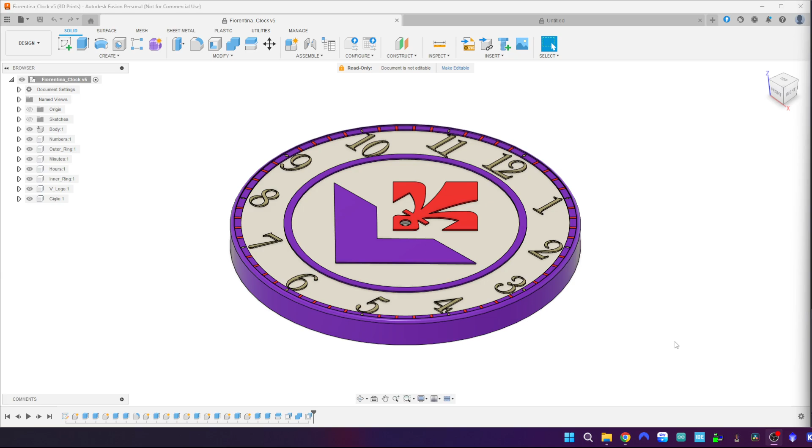So let's get started. Open another tab and create a new sketch. I normally like to put a circle as a reference. I want to have this clock at 230.

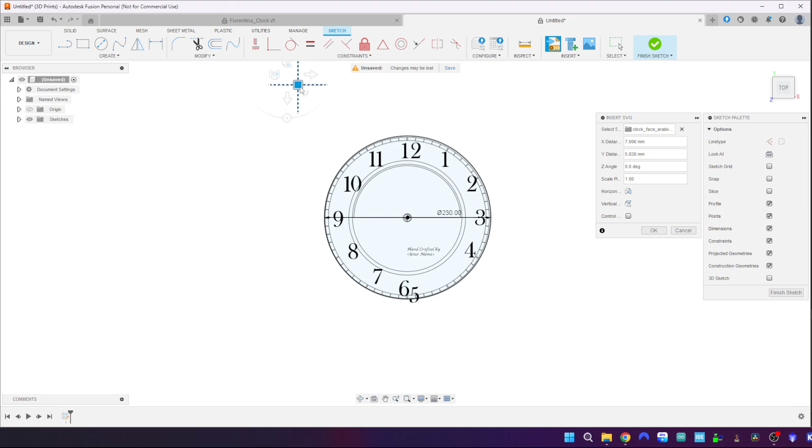So then I can go and insert from... let's have a look at this one. Insert the SVG and we rescale it roughly to match the size you want, which is roughly that.

Okay, now you don't really need that one anymore. First thing to do is convert everything into lines, and as you can see we need to adjust a little bit the numbering. So let's do that now.

If you find a better SVG, probably all this is not necessary. Let me put this one more into the middle, probably there and there, a little bit more. See if I can select both. Yeah, like that. And get this one, put it there, and then this one we go there. Like that.

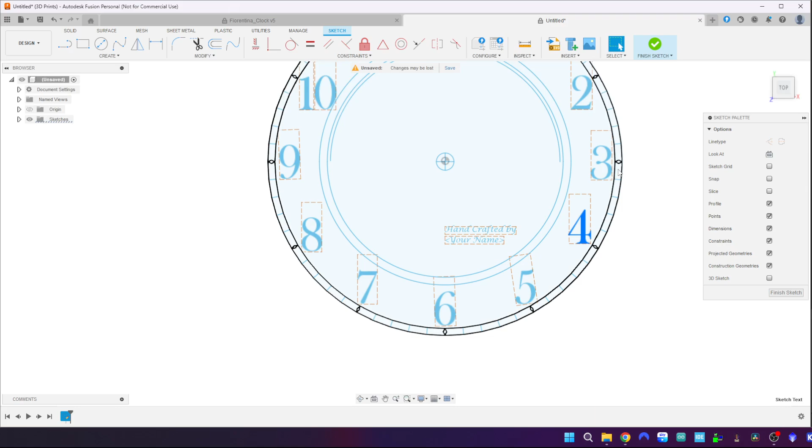And that should do. Okay, it looks okay there. So I can delete that one, and I can actually delete that one too. What else do we have here?

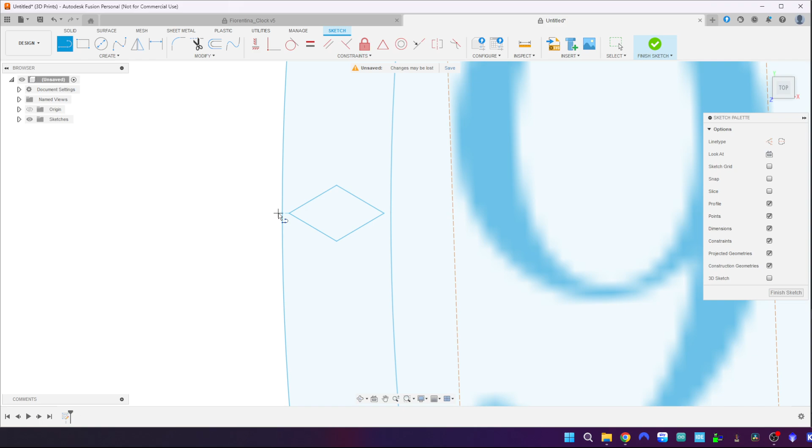Okay, let's see if I can center everything point to point. So I hope this is center. No, it's not. So let me delete all that and see if I can find... hopefully this one is in the center, and looks like we are leveled.

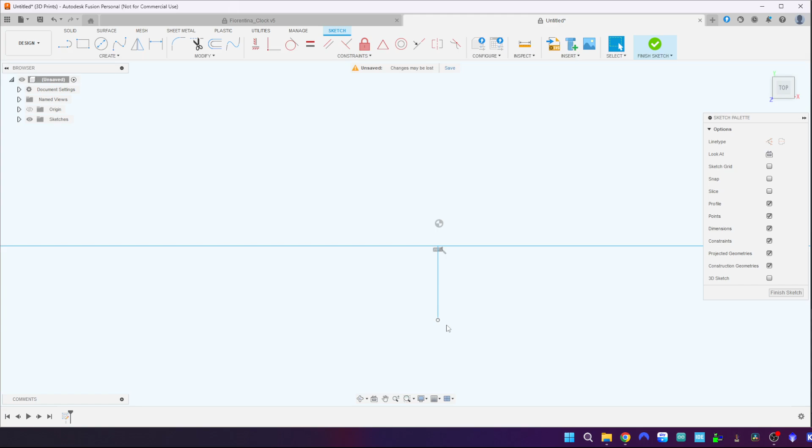And now I get the line until I find... should be able to find the middle point. Is that one? Let's try. Connect everything, point to point. And we move that one to there. That should have moved everything to the middle. Now I can remove that, and I can remove that.

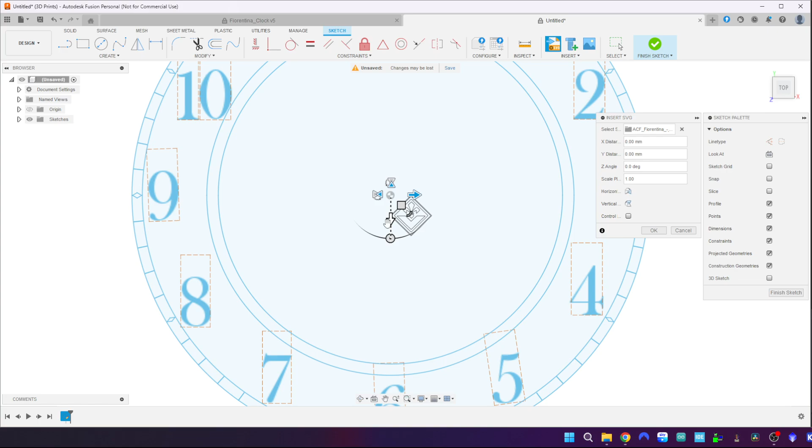Now, next thing I want to import is the logo of the team, which is this one here. And I'm going to move it, leave it inside until I get the scale right.

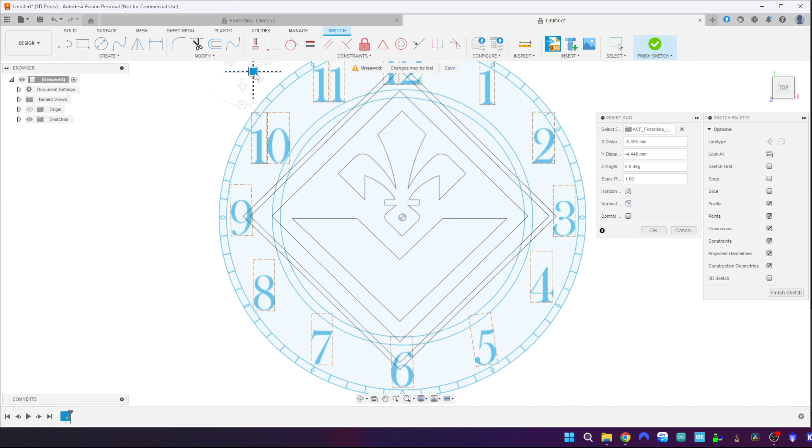And that... probably it's a bit bigger. Well, I'm looking at the symbol here and this V shape. I'm not looking at the rest of it. Right, I think that seems to be okay.

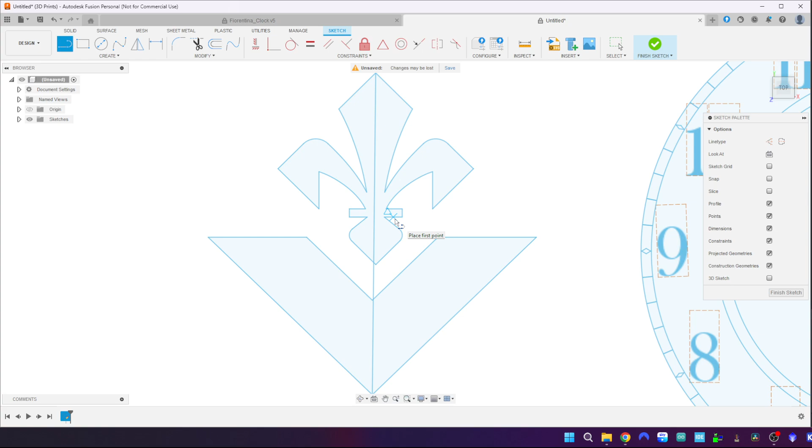So let me move it to the side, press OK, and do that again, and then remove all the bits, and then see if I can find... it's not completely centered.

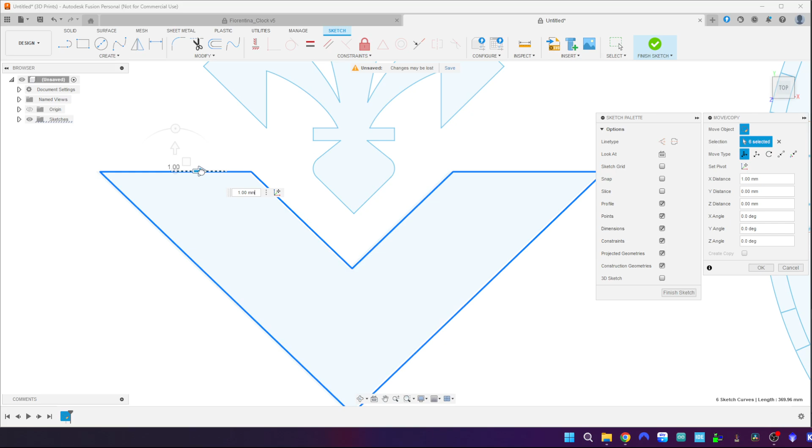Let me have a look. It looks slightly better. So now I am moving the whole lot inside there, and what I'm trying to do is I don't want to waste too much time on here, so I'm eyeballing it. This should be roughly in the middle of that, and that looks like it.

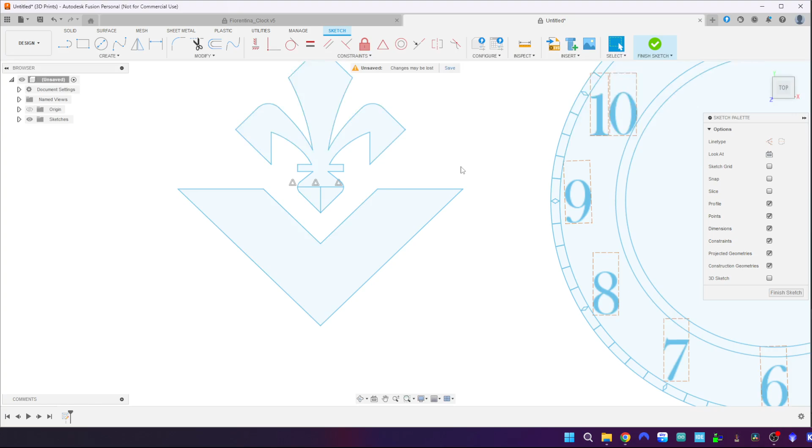Oh, actually, let's do it slightly better. So we roughly get the middle point there, and we get the middle point there. So now what we can do is reselect everything, move point to point, and we click on that point there, and that should be pointing there, and that looks actually nice.

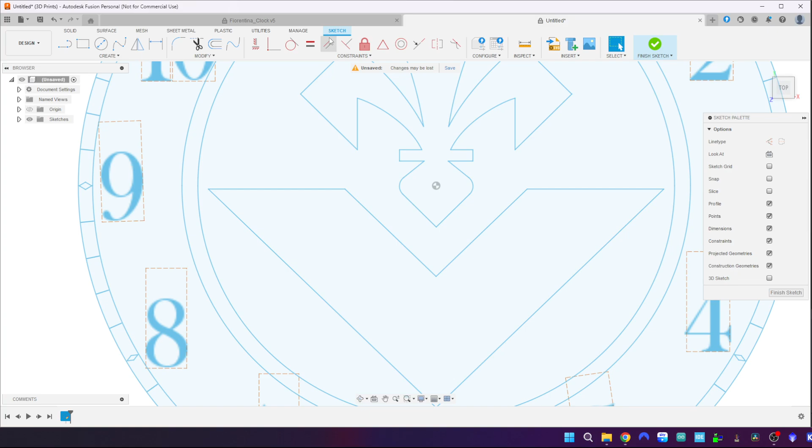On this one I just eyeball it, to be honest. I haven't measured anything up. So now we have the main face of the clock done.

What I want to do, because this one will be printed probably 3-4 mil thick, and then there will be the mechanism going behind. The mechanism I have, I got it from Amazon, it's about 16 mil thick. So what I want to do is create a base to offset the face from the wall.

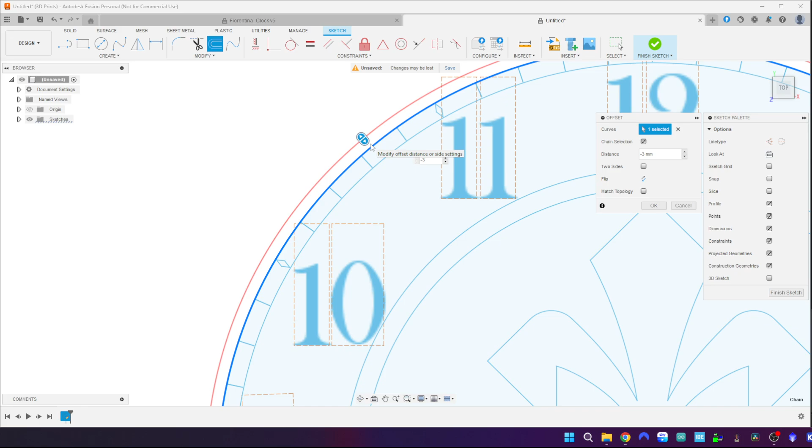So what I'm going to do is offset this one, not two sides, one side, and we offset as a minus, minus, let's do 3 mil. I need to get a bit of strength there, and we do it that way.

So now the main sketch should be finished, and I click finish sketch. Now we should be able to start to extrude.

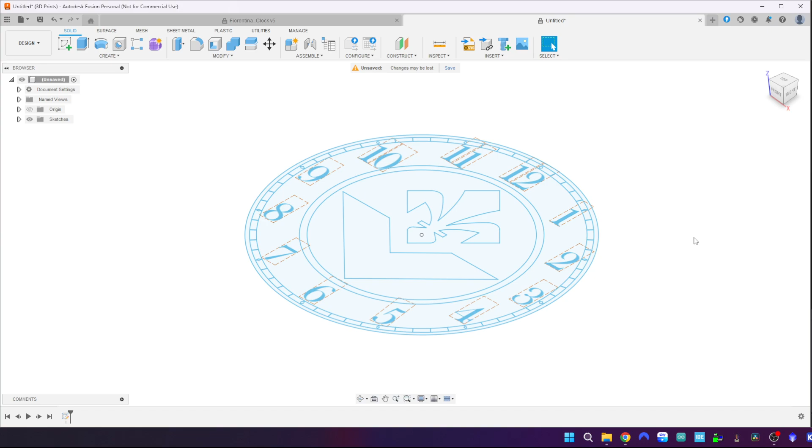So what I'm going to do is create the base, then the numbers, the V and the logo, plus the circle, and all the minutes will be raised from the bottom plate by about 1 mil. Then I'm going to extrude this one 1 mil higher than everything else, because after printing I want to put some clear resin on top of it to make it shiny.

So let's try to do that. First thing I want is, select all, extrude the whole lot, and we extrude... I think, did I say 3 mil? And then we create a new component here, and we press OK.

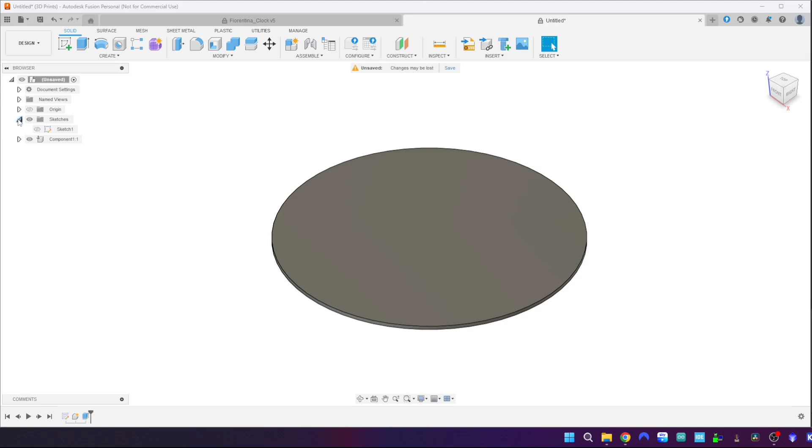Now we put the sketch back, and we can start to, I can hide that one, and we can start to see if I can do them all together. All the numbers. Oh, another one. That, and that.

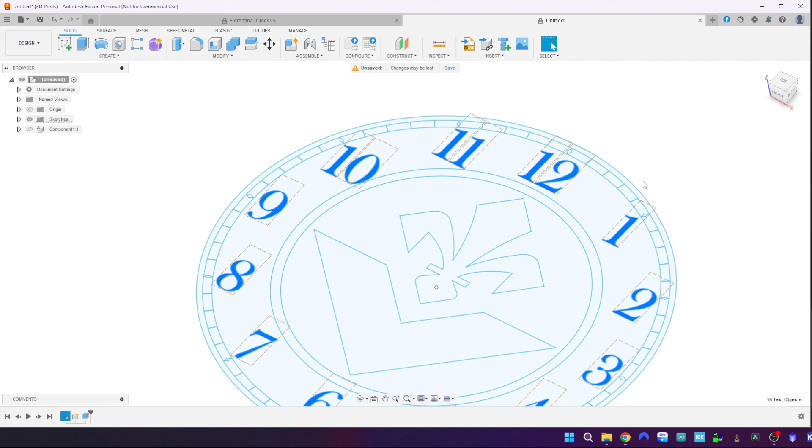Extrude. So now I want to offset, because I've got 3 mil up from the base, so 3 mil offset, and the distance is 1 mil. And again, a new component, and press OK, and we rename this component 'Numbers'.

Cool. Now, oh, I forgot to do one thing here, but I can do it now. I wanted to offset all these to create lines for the minutes.

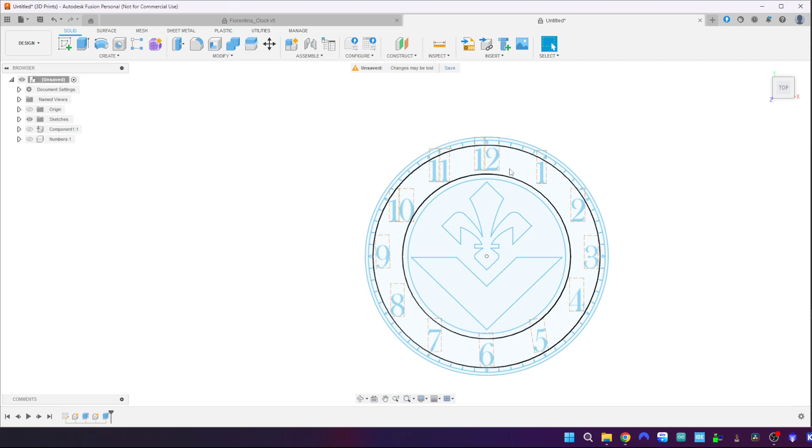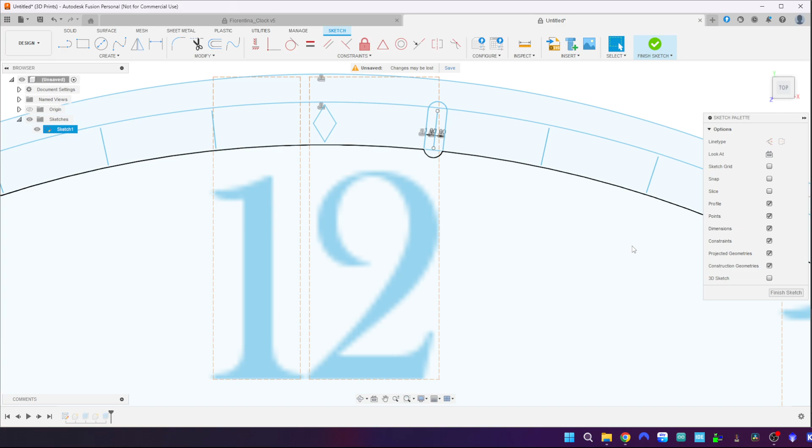So let me go back to the sketch and edit the sketch. We edit the sketch and offset two sides, 1 mil, 1 mil, 2 mil. Yeah, that's okay. And we do that for all of them. Offset 1, okay. Offset, okay. And so on.

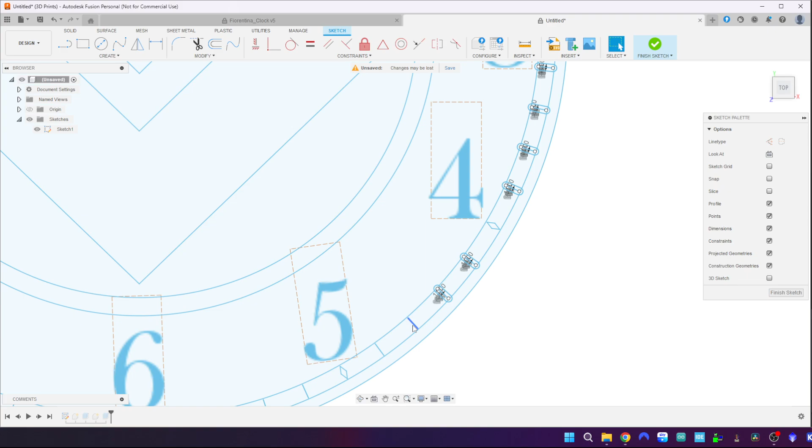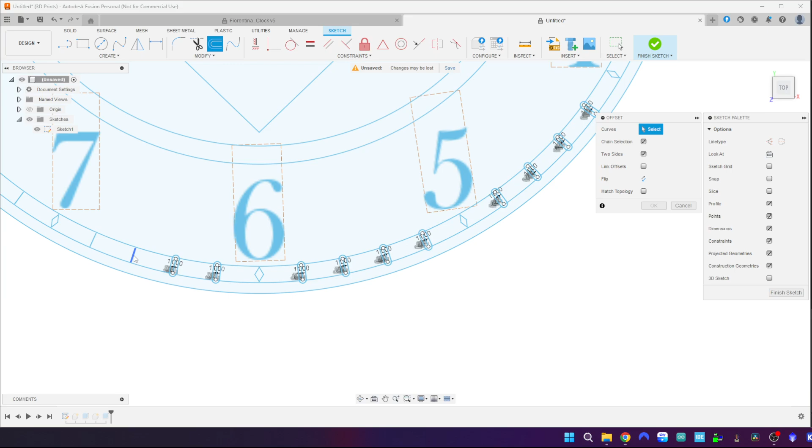Oops, got the wrong way around on that one. And it's a very tedious job, this one. I probably would be better off deleting them all and doing a circular pattern to create all at once.

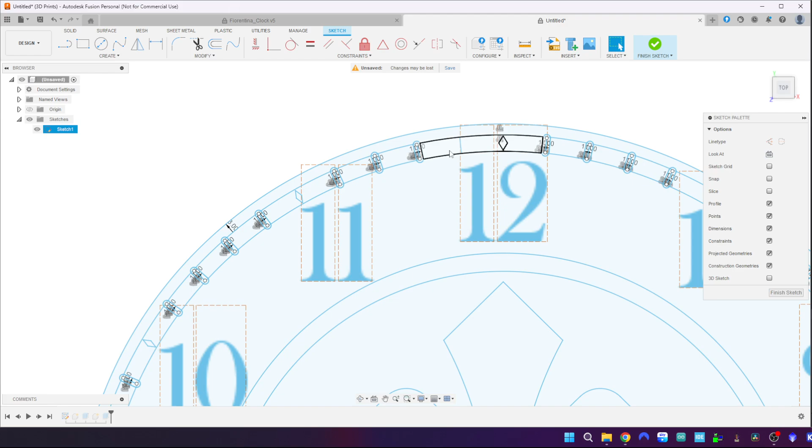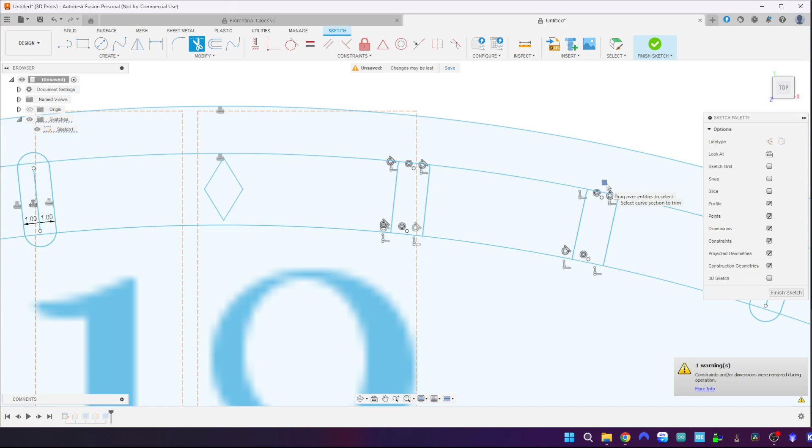Nearly there, although we need to go back and do some cutting. Right, so now start the even more tedious job. And we do all that. Lots of patience needed to do these little things.

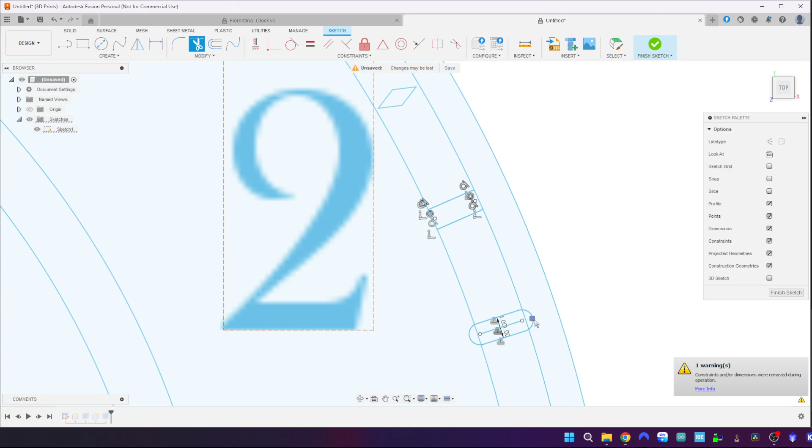Don't know why I've got double lines. Not sure why I got those. And so on.

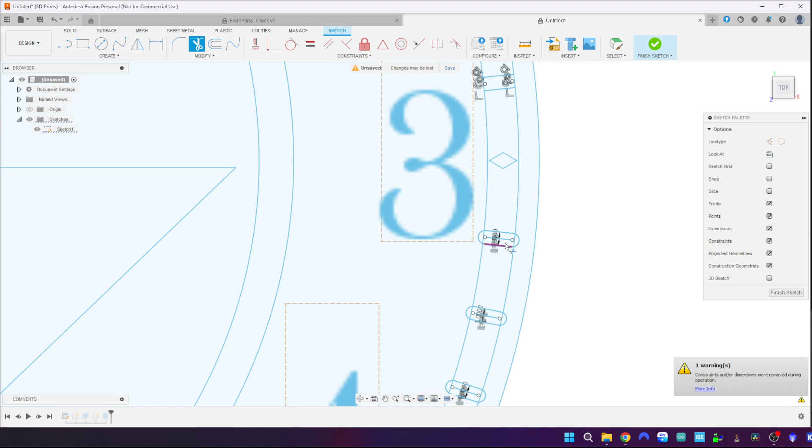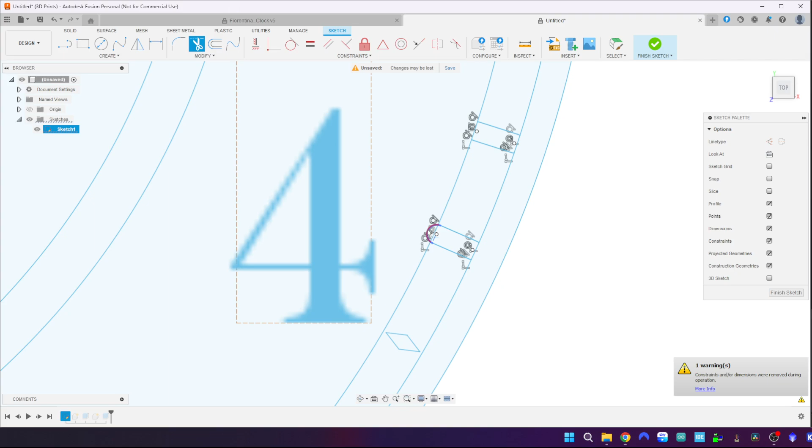I mean, I should be editing the video and make it faster in this section here, but I'm not really good at editing yet. I haven't actually played with it. So I don't want to just waste time on editing where probably I won't gain much. You can fast forward that if you wish.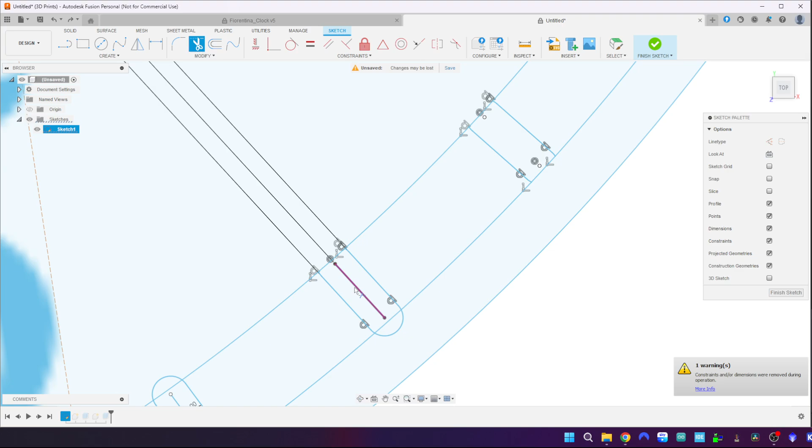Click, click. Nearly halfway.

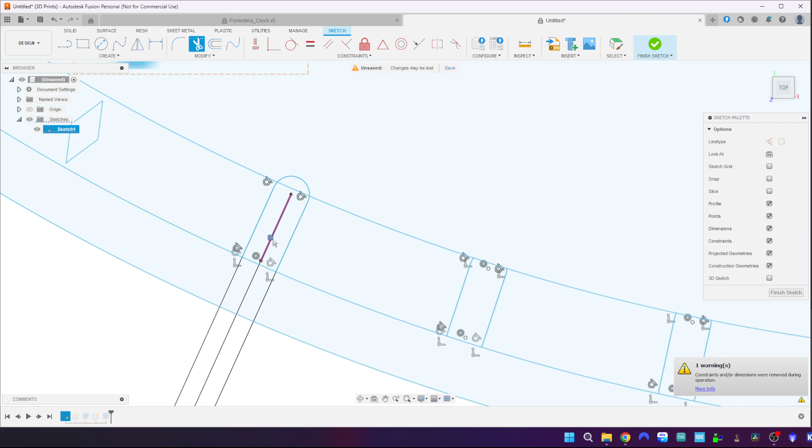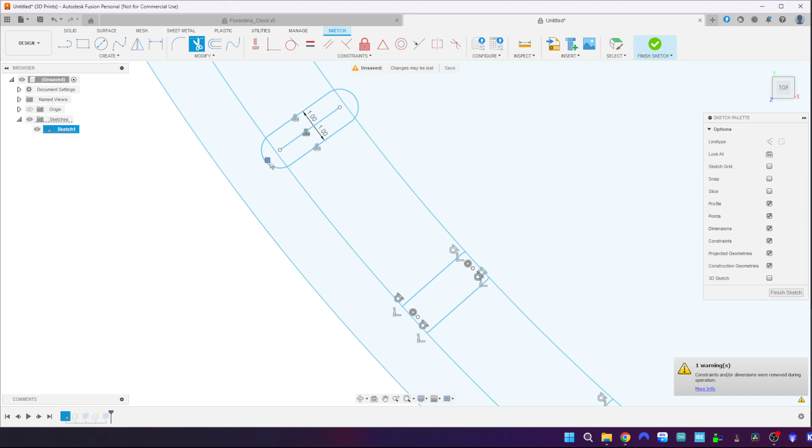Also, I could have put the video in pause, but the pause button has disappeared from my recording software, so I don't know what I did, because I've played a bit with the settings of the microphone, so hopefully you can hear me slightly better, and also less ground noise. Also, I have a new microphone coming soon, so well, give that one a try, and see if we can improve the recording of the videos. I know there's not much we can do about my voice and my English, so I hope you can bear with that.

If I could change that, I would be very happy to do it.

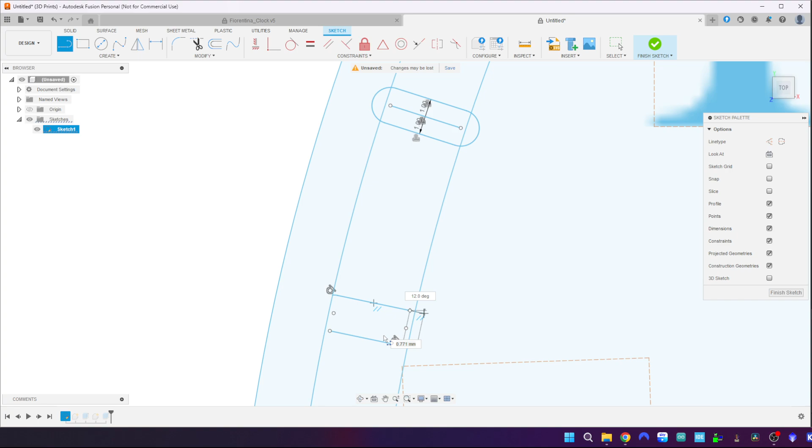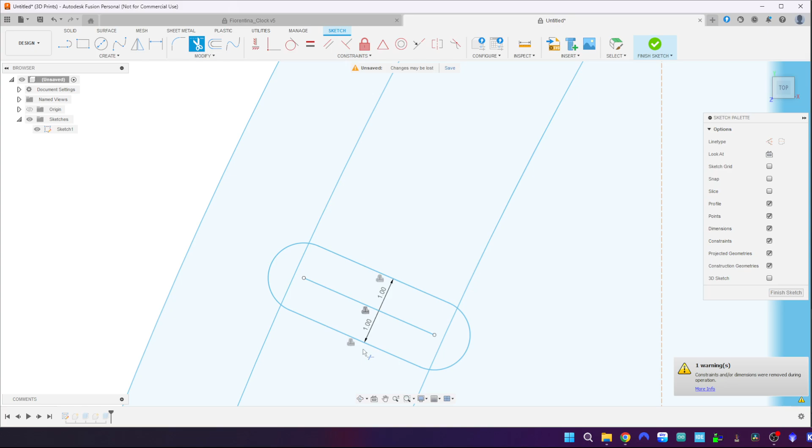Oh no, this computer I think needs a bit of a refresh. Start to lag a bit. Got too many programs installed. I think it starts to get a bit clunky. That's Windows.

I wish they could do Fusion 360 for Linux. I would use that instead. I have read we can run it with some sort of emulator, but I'm not sure how good that is. I may try one day, but not at the moment. I've got too much going on.

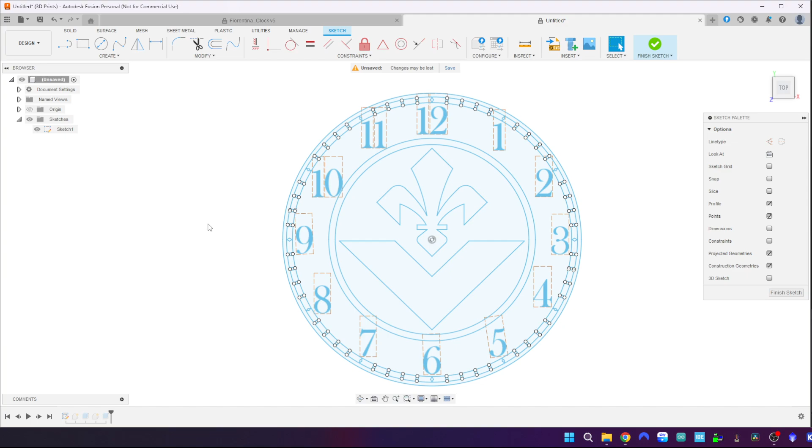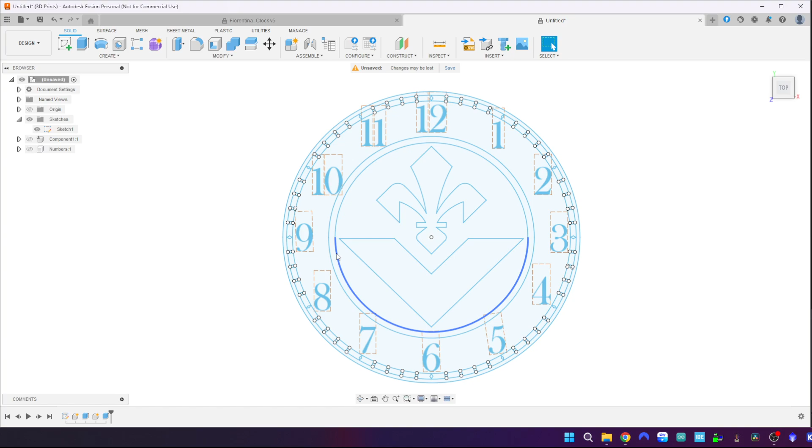So we've done that. Let's finish the sketch again. And now where we were, we've done the numbers, so we can extrude. Done the number, we've done that. Don't need to do this. I need to do that. So extrude that. Let's not forget what we need to do.

So 3 mil from there, 1 mil up, new component, and I can call it inner ring. Put the number back in, extrude that one up, offset 3, 1, call it V.

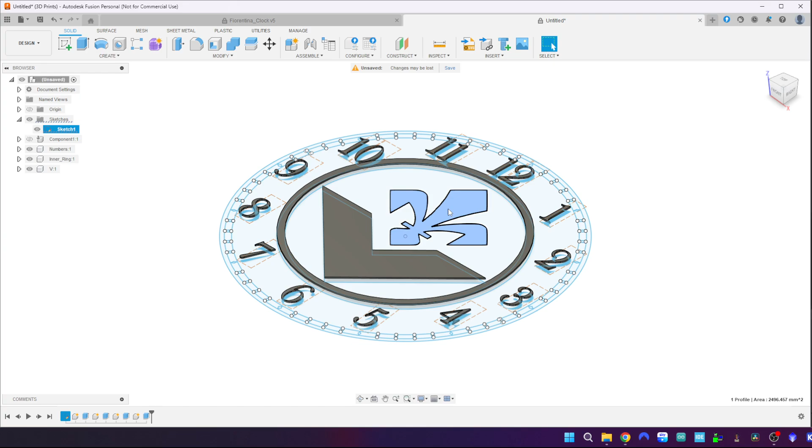And extrude again, offset 3, no, that one, 1, and Giglio - sorry, that is the name of my team. And now what we're gonna do, we need to select all these individually.

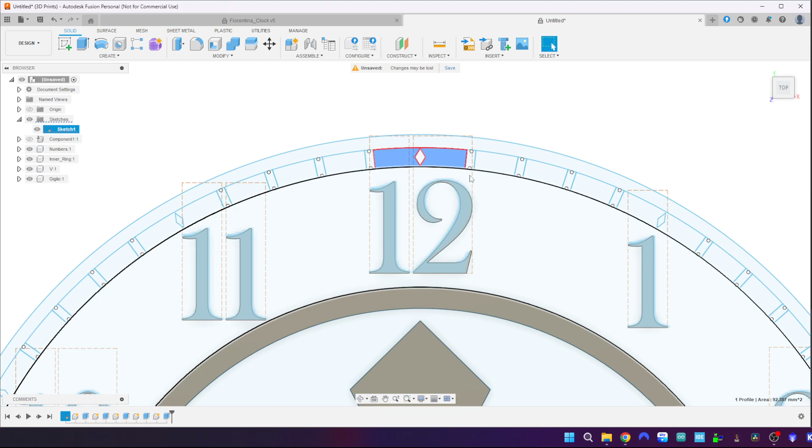This is not too bad because they're quite big. You can select quite quickly. And we do extrude.

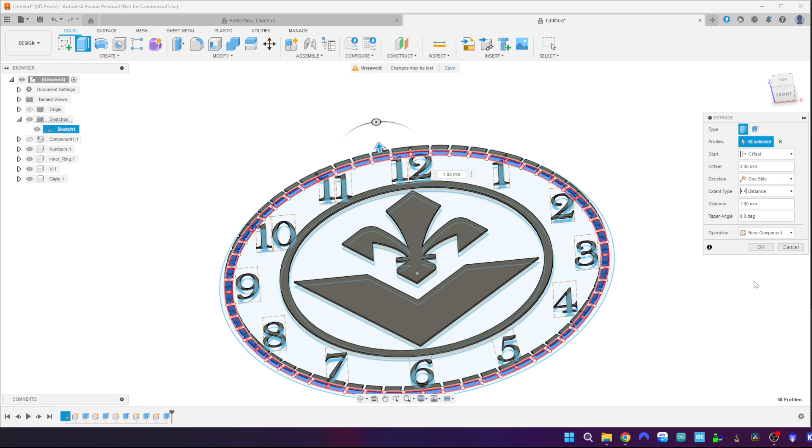The arrow still in the right direction. 3 there, 1 there, new component, and OK. Call it outer ring.

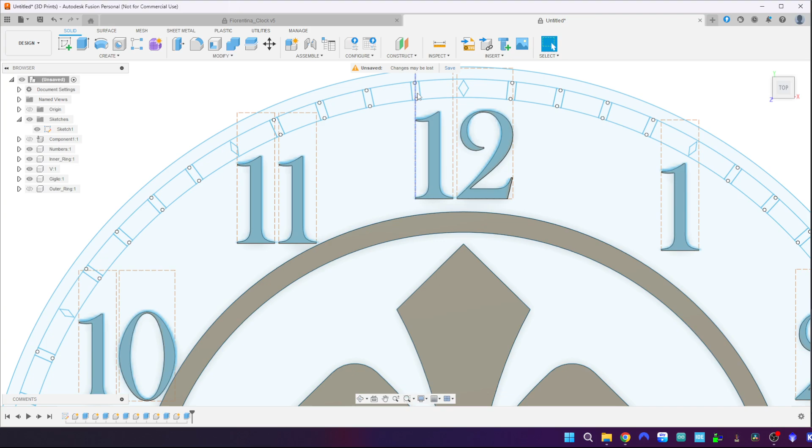I'm gonna hide that one because it will be in the way. And now I need to do all those. Those will be the minutes, and then the hours we'll do later. I want to keep them separately because I'm gonna print a different color.

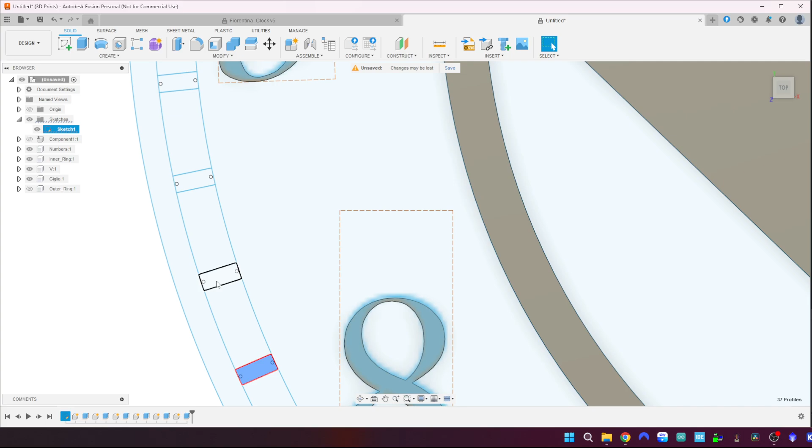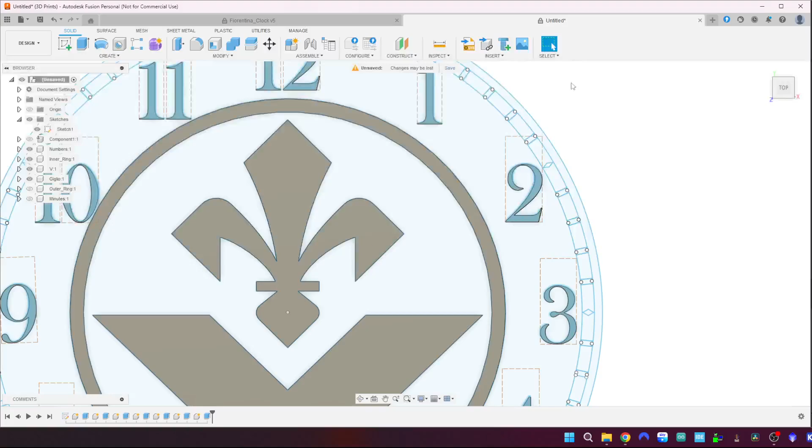There we go. Extrude 3 mil, 1, new component, and OK. And here we call it minutes. And now I think the last one for now.

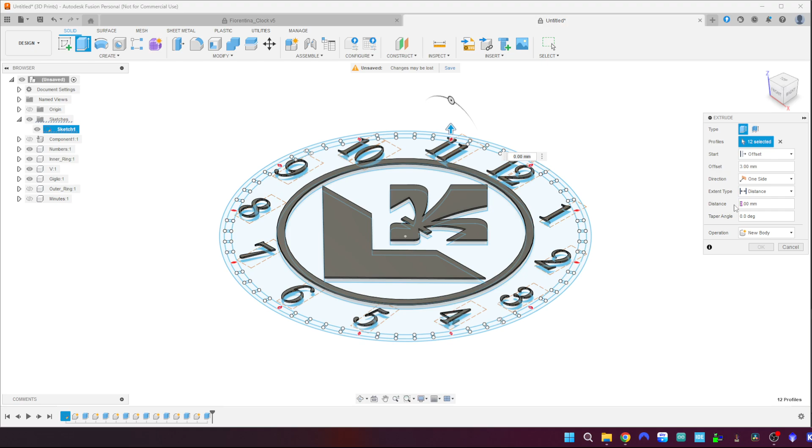And we do the hours. There we go. And once more, offset 3 and 1, new component, and we call it hours.

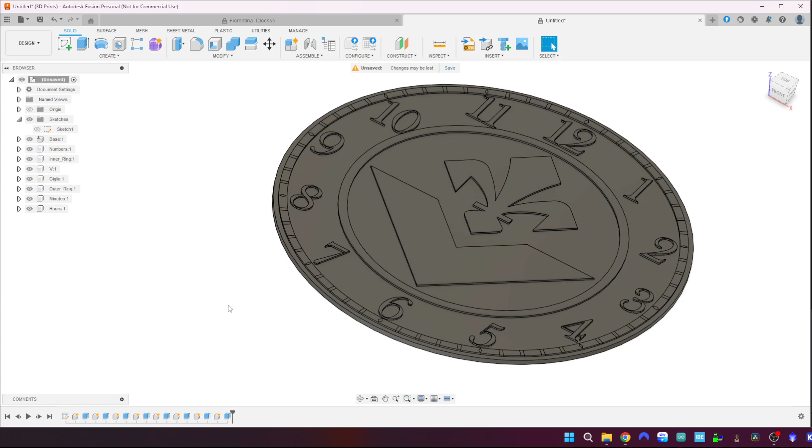This one we can call it base. I'll put everything, take the sketch off, and that is what we have, which is fine. Now what I need - the base off, I need the sketch back on. Let me take all this one off.

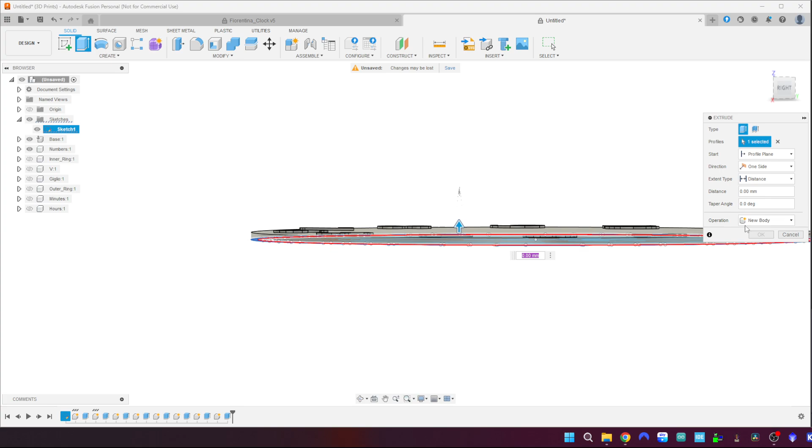And we do extrude. So that is 3. Then we go 1 mil 4. I'm going to extrude 5, so we extrude 5 mil. But it's not going to be a cut, it's going to be a join. Yes, and click OK.

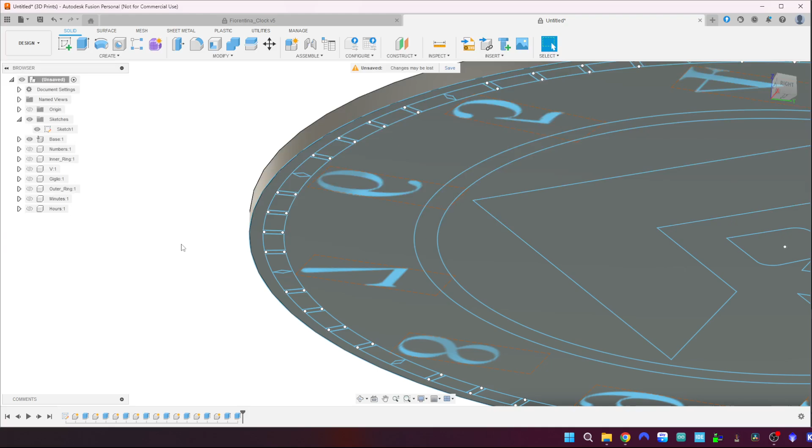Now I'm going to extrude down minus 17, and I click join as well. Let me take that one off.

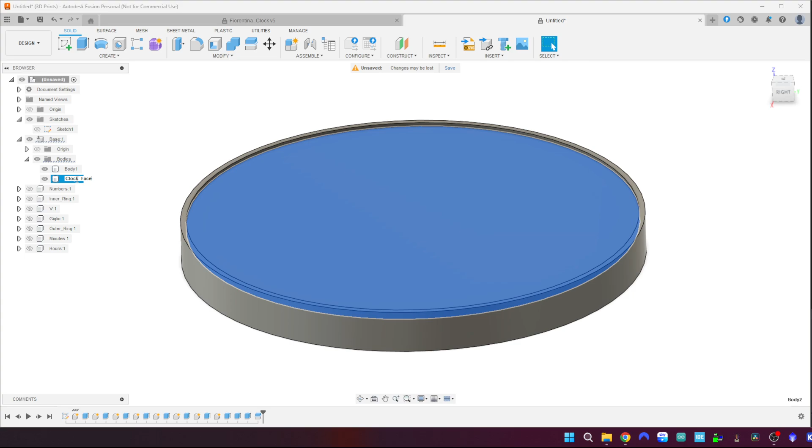Yes. Yes. So now actually I take the base off. So I'm gonna split a body. That's body to split, and I want to use that. Now if I go here, I have clock face, and this is the base. So I have that, and I have that.

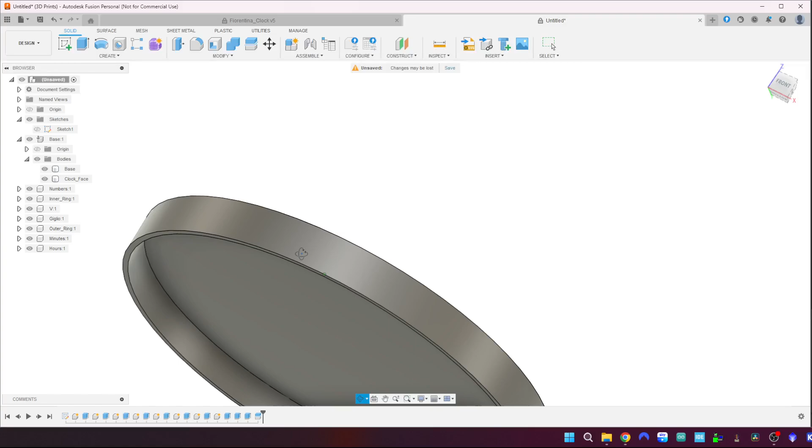Now if I'm going to print it like this, we're gonna need lots of support underneath here, so that is very impractical. So what I'm gonna do, I'm going to make a little support for that. So I am going to press and pull that 1.5 mil in, and I press OK. Then I put back the clock face, and I am going to say to combine.

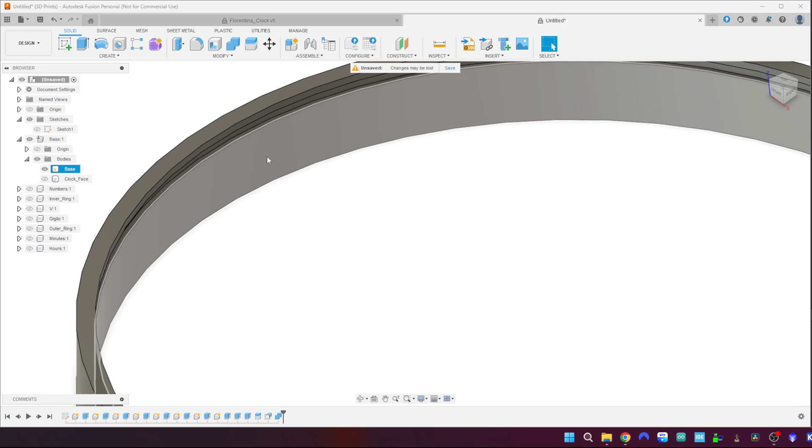That is the target body. This is the tool body, and I'll say cut and keep the tool. Click OK. If I remove the clock face, you can see there's a slot, and now I can do press and pull, and I can do minus 1.5 to return flush where I was. So now I can print the two items separately without the need of support.

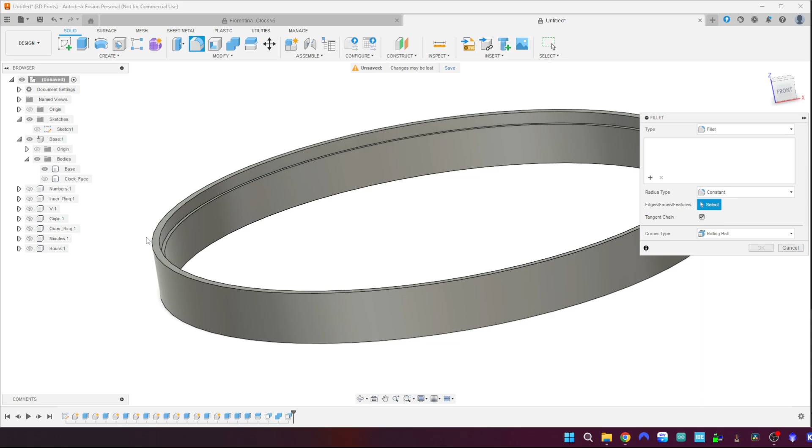So now I like it to have a bit of fillet, so 2.8 maybe. Yeah, not up to this there. Yeah, and we'll leave that one there, and we can put that one back in, and now we can put all the stuff back on. That is the clock. One thing I need to do actually is take the one and the one off, put the sketch back

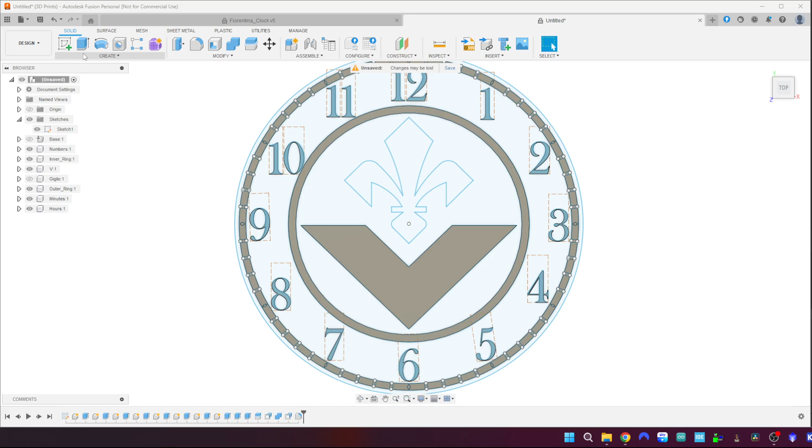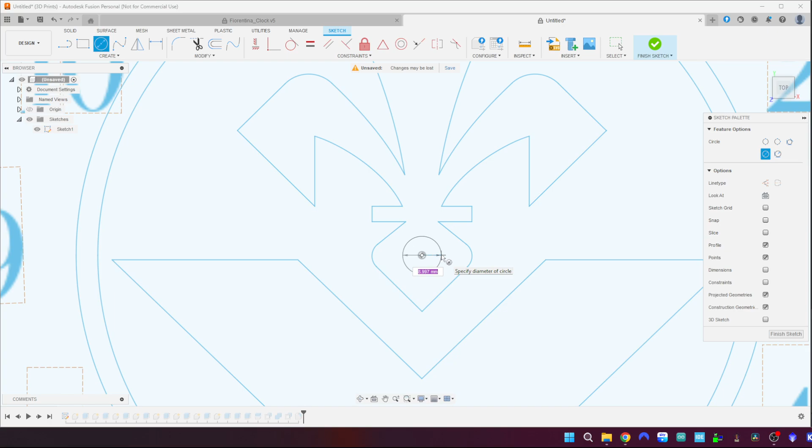on. I need to edit the sketch, and I need to do a 16 mil, I think it was, or 9. Sorry, I'm just looking at the moment as I talk, because I can't remember the size of it. So bear with me a second. 8 mil. Needs to be 8 mil, so I'm gonna do probably 9, just to be sure. Finish the sketch.

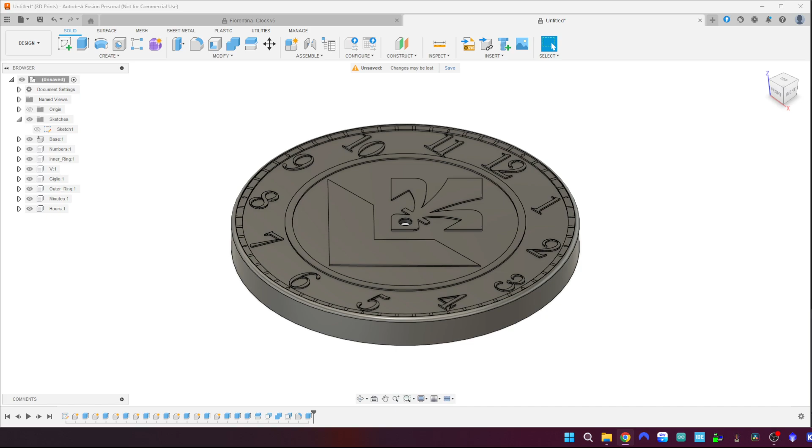Extrude throughout. Let's put the giglio and the base back in, and say cut. And now we have the hole for, what we say, to put the mechanism at the back. So now I need the colors for the clock. So the colors are... Let me find my log again. Okay, here we go.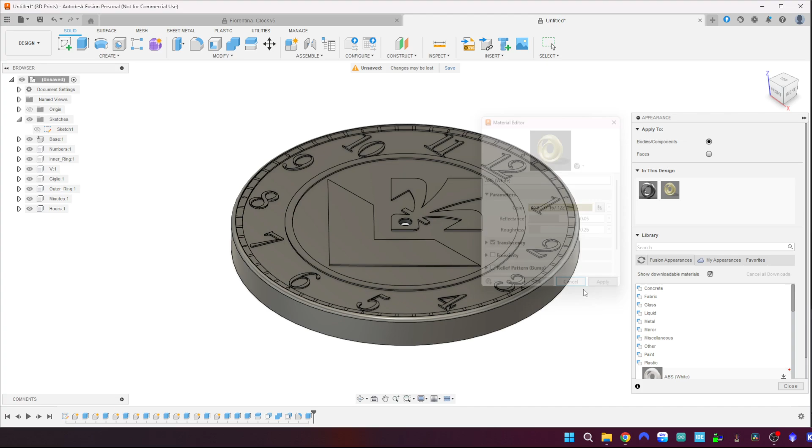So right, appearance. ABS white. So we're gonna edit that. Gonna get the gold. Okay, apply. Then I'm gonna get the red. Then we're gonna get the purple.

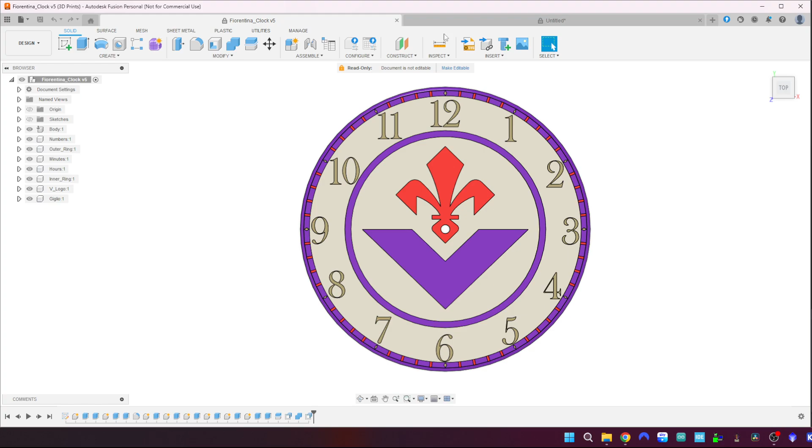And then last thing is the white. And we have white there. We have purple there. I want purple there. Where was the purple as well? Okay. Appearance. Which one was the red? Sorry, I forgot. The minutes was the red. So for the red, I'm going to the minutes and we do it that way. It's quicker. The numbers I want in gold because I like them.

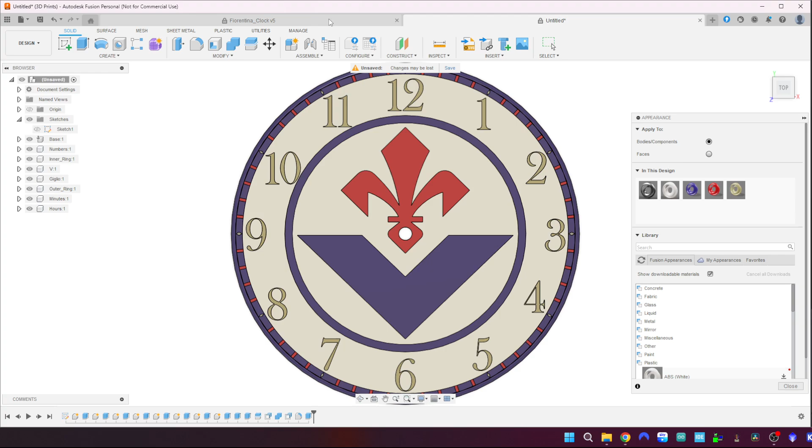Giglio is red, and then the inner is purple there, and the outer ring is also purple. There we go. And that is the clock done. So what you do now, you export in two different ways. Oh, sorry, I need to take this one page up. So you export this one.

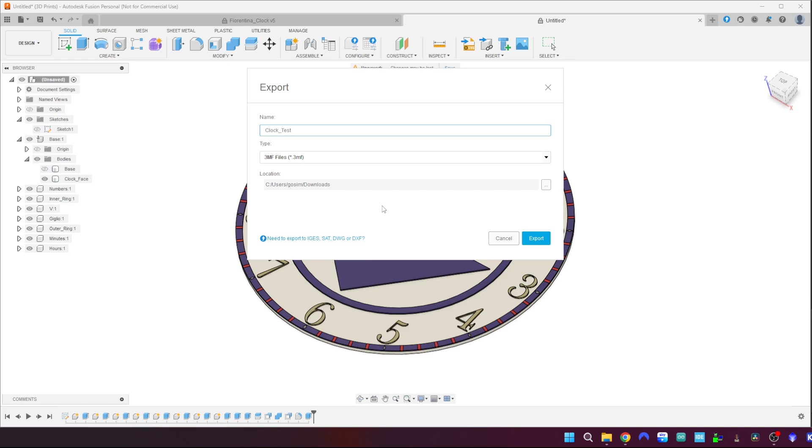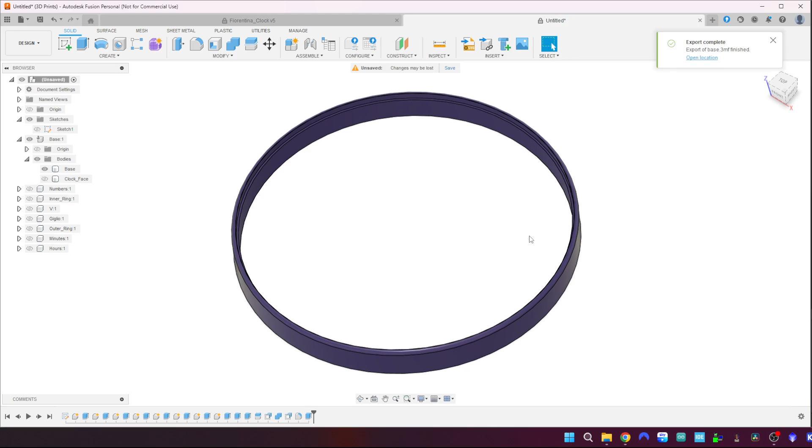So to do so, you go to the file here, you export, you choose 3MF, and then clock here, clock test. I have already mine, and I'll put it in the downloads and I click export. Then I put that one back and I remove everything else, and we do export, base export. Now that should be it.

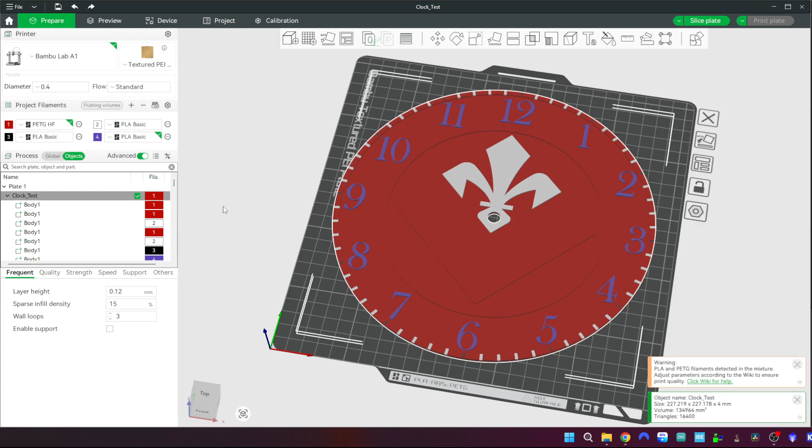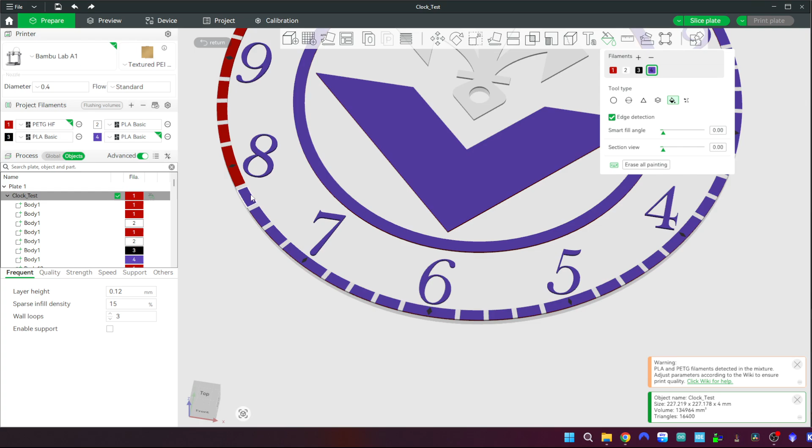So then what I do, I open my Bambu Studio here, I was playing about, and what you do, you import. I will tell you that. You say okay, don't scale it, and different parts, and that is what we have. I think I have removed the gold. So just for the sake of the video, I am going to do purple. It's going to be that one, that one. Oh, I need to do them all singularly. Yeah, because they're all different bodies. They are all different bodies.

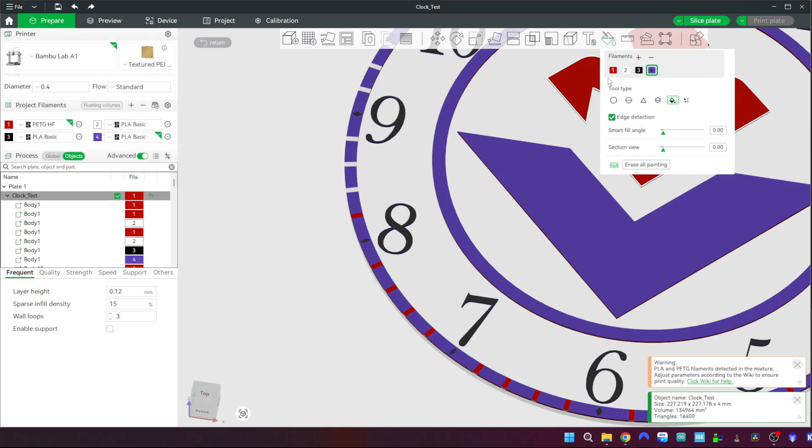Like this. Then you want the one there, and then say the black on the numbers, only because I haven't got the gold. And where we go? We go all this to do. And you paint everything. Oh, that one. Go back. This tool is quite good from the Bambu Lab Studio.

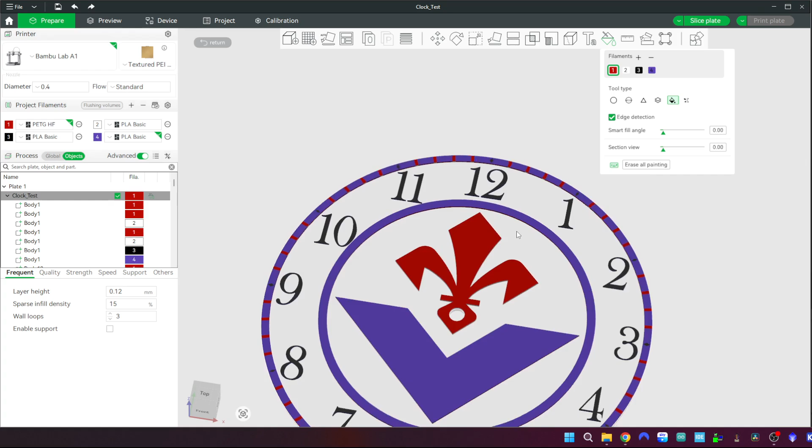This is my first Bambu Lab printer. I have two Creality printers, but this one is the first Bambu, and I'm very pleased with it.

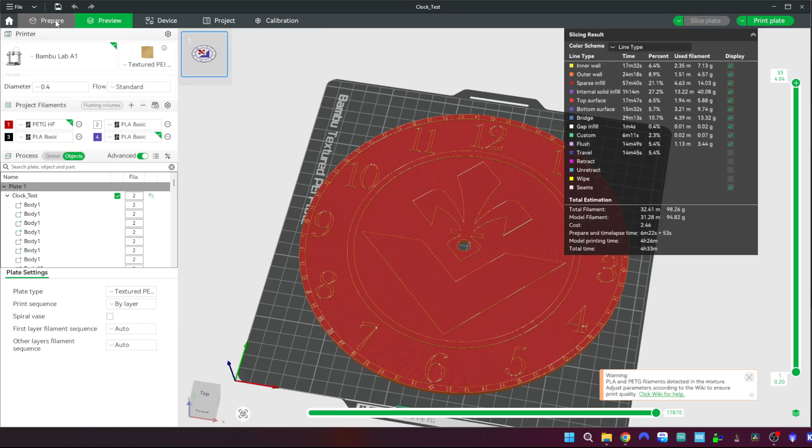So after you've done that, oh, it's ready to go. Why did this one come back? There should be two. There we go. I forgot about that one. Now it's done, and then what you do, you slice it. You choose what you want to do, settings, and everything, and it takes about 4 hours, 4.5 hours. There's a bit of a filament change, so here we go. That's how I do it. On the next video, probably I will show you the final product.